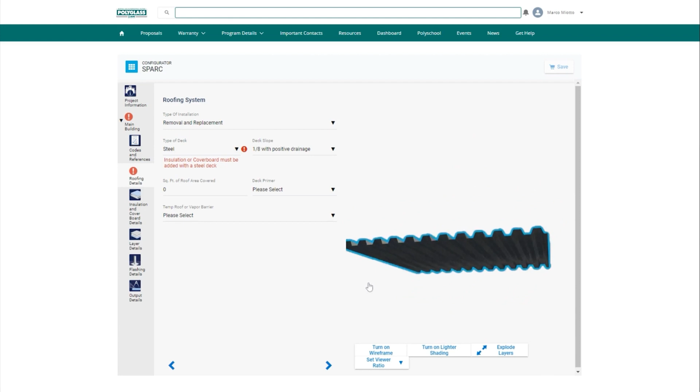Where are we at - removal and replacement. All right, so here you start talking about the deck. What kind of deck do you have? And you start building a 3D image of it on the right side of the screen. If you're giving a presentation to, say, an HOA or any of your customers, you can really explain what all these different decks can do for you. We give you a good graphic - you can zoom in, zoom out, all that kind of good stuff.

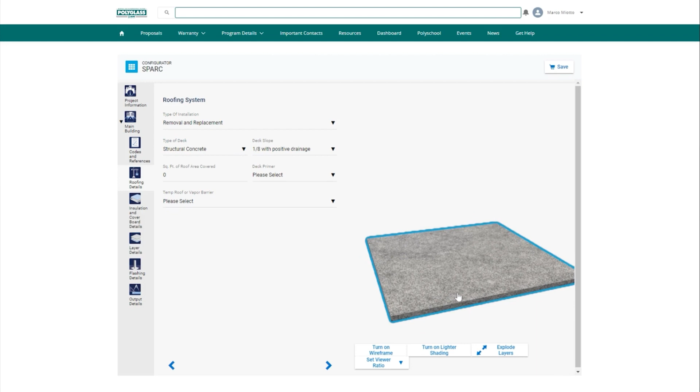Here we're going to pick concrete deck. This is a re-roof system that we're doing, and it's just going to start asking basic questions. What's the slope of the deck? Is it dead flat? Then you're going to have to put a taper system - we don't warranty any jobs that are dead flat, so you have to add slope to it. It will remind you as you go through this, don't forget the taper system.

We're going to prime this deck, and we're going to torch down an SBS membrane. You'll see right here it gives you the option APP or SBS, and it's going to give you the options of what membranes you can use in that system. So to pick an SBS, we went with our Elastoflex S6.

Next section is going to ask you about insulation. Is there going to be ISO? Yes, again we're going to have taper. If you have multiple types of insulation, you can add that in there - so maybe you're doing a hybrid system with polyiso and EPS, you can document all of that right here. Or we're just doing one layer, 2-inch ISO, and then we're going to add a taper system in here as well. Then you can put in R value, average R value, whichever document or type of insulation you need to put. We have our Polytherm ISO, then we have ISO by others also listed in here.

And now we're going to start asking you about your cover boards. We have all the cover boards out there in the industry that you possibly use, so you pick which one you're going to want. You put in the dimensions of that - 1/2 inch, 5/8, 1/4 inch. So we're picking our Polyboard HD, 1/2 inch, and the rest of that gets added into the visual.

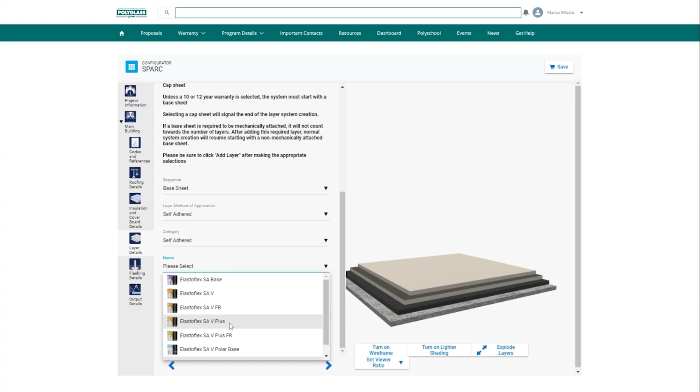Right after this, you're going to add the membranes. Here we just give you the basic outlines of how you have to enter into the system. We're going to start with our base sheet. This particular system we're building for you is a stick and torch system, so we're going to do a self-adhered base. And because we're doing a 20-year warranty, it's already eliminated the products that won't fit for that warranty. We're picking our Elastoflex SA V Plus, and you can see where it's listed there - it'll tell you the ASTM number, the thickness of that membrane. In the picture itself, that's exactly how our membranes look on the roof with all the measurements laid out on it.

We're picking the cap sheet now - we're going to go with an APP Polyfresko, that's our white reflective cap sheet. Again, it's only giving you the options that qualify for that 20-year system.

And now you have your roof built. Now right here, especially if you're doing a presentation in front of your customer, you can actually zoom in on each picture, get more information on that roll. You'll see how it's packaged, it'll give you its weight, its dimensions. You can actually explode the deck, so you can explain to your customer what each product can do for you - what does a base sheet mean, what does the insulation mean, how's all that laid out.

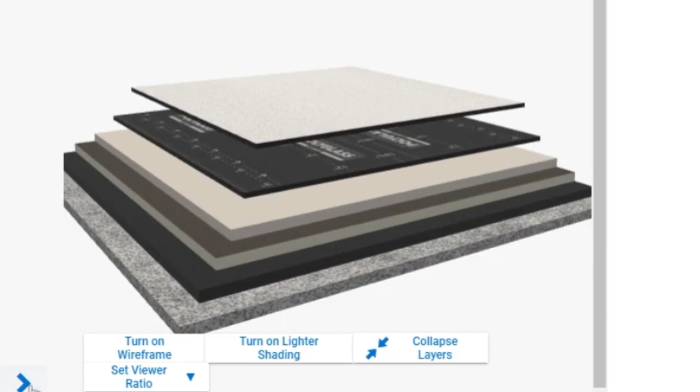Then the next item it's going to ask you is flashings. Thank you. So for the flashings, this is important for your specification. We're going to say your wall flashings are going to be similar to the field. Just leave that as is.

But then our penetration flashings, we're going to give you the options for liquid flashings or membrane. This one we did liquid. We're using our Polyflash 1C. It also gives you an option for PMMA.

Now, when we started this program, we said, hey, for our substitution requests, what are the questions you need? How do you properly fill out a CSI document for an architect or a specifier? We have all that information in here so you can pick which products you're going to substitute.

So right here we're saying this is a TPO system and we're going to substitute a mod bit system. Then you go right in there, your paragraph or the page and the paragraph to meet the needs of that specifier, and also the specifier's name.

One of my favorite parts of this is coming up, and that's the detail drawings, because you can pick from a variety of details, and in the final package, each membrane is going to be called out with whatever you picked in the configurator. You'll see what that looks like in just a moment.

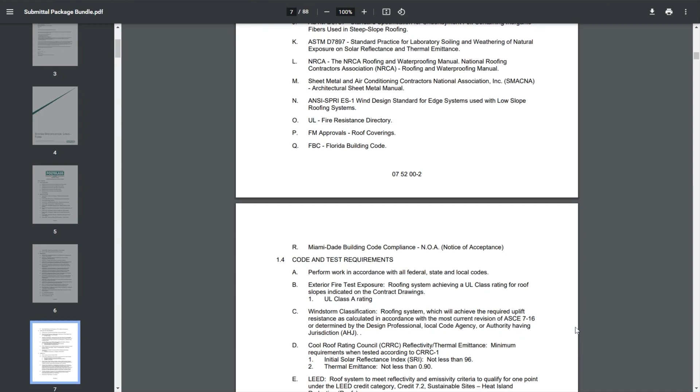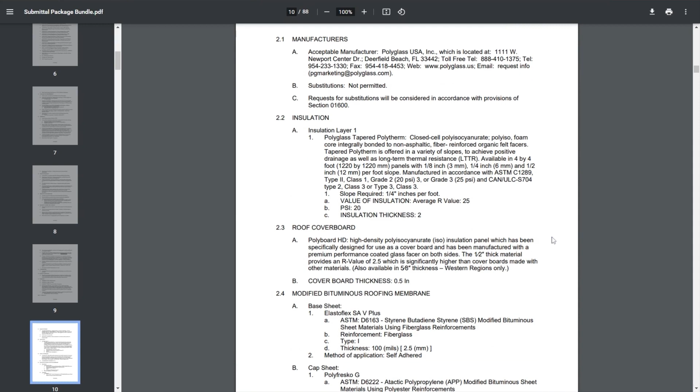You go further down, now we get into the long spec. Now there's a lot of stuff going on in the spec, we're just going to quickly go to the meat of it. You can see where it calls out the 20-year warranty, the products, the insulation, the membranes that you picked out, and then even the flashing details.

Now, depending on the deck that you picked, if you did concrete deck, steel deck, or wood deck, it would have the preparation details in there of what you would have to do for that specific deck.

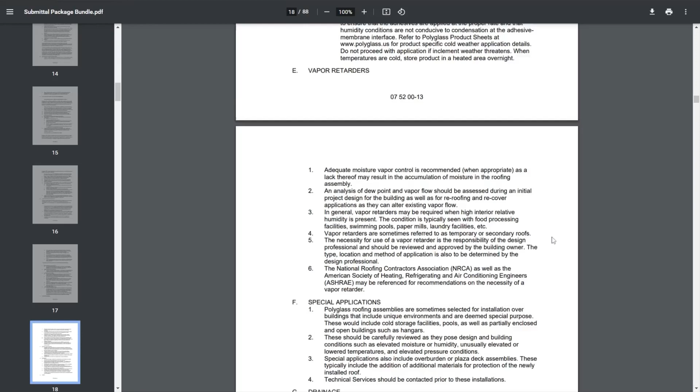The next thing that you're going to see, eventually getting through the spec, will be a sample warranty that should be requested early on in here. So this is a 20-year sample warranty, part of the package.

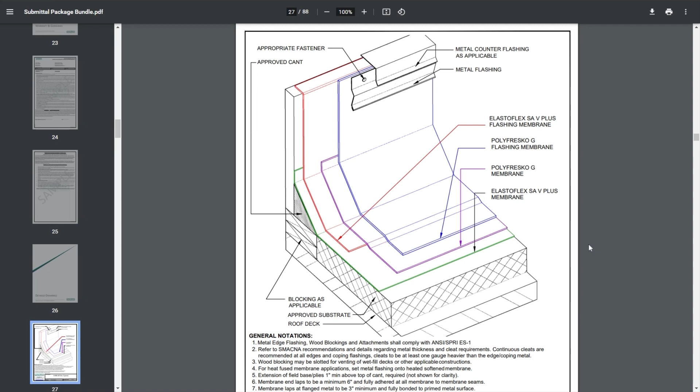And then we're going to get to the detailed drawings. Now this, I don't know if this laser will work from here. Nope. You can see it points out exactly where the Elastoflex SA V Plus and the Polyfresko G are listed out, and they're pointed out exactly the way they should be, customized to that specific job.

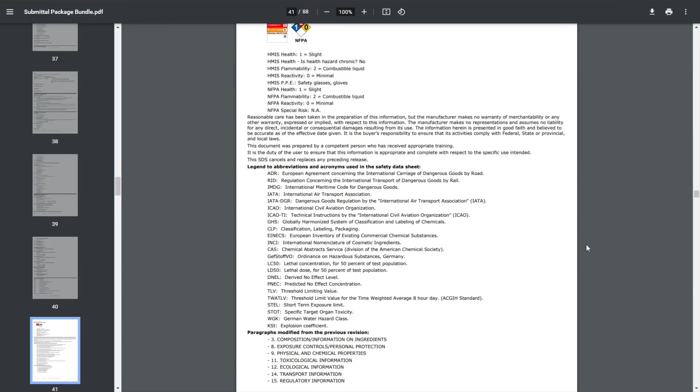After this section, we come across all your PDSs and SDSs. All those documents that you typically have to click on and put in a bundle and correlate together, all of that's already been done for you. You don't have to put any thought into it.

Now, if you do use a product, say like DensDeck or SecuRock, it's a cover board, that is not a Polyglass product, you'll see a stop sign that comes up in the document that will tell you, hey, don't forget, you've got to change this out and put in the PDS for that other product.

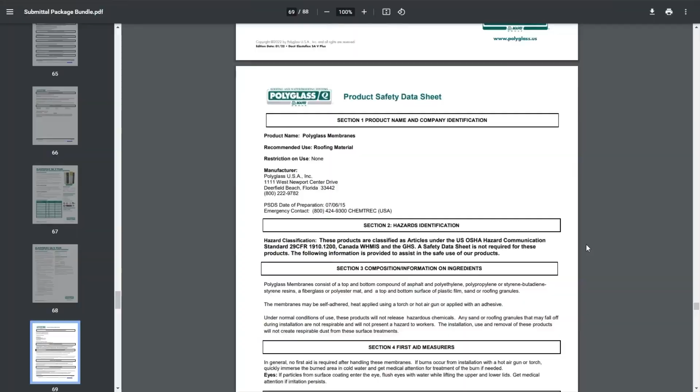And this section can be several pages. I mean, I think in this particular document, there's about 48 pages worth of PDSs and SDSs that go into it, so they can drag out.

Then the very last thing is a substitution request form. And this is exactly a CSI document that you would need to give to a specifier or architect, calling out the membranes and the pages that it's located in the original spec.

I know that seemed very easy, very simple. I promise you, it really is that easy and simple. It's not a lot of work to put together one of these packages.